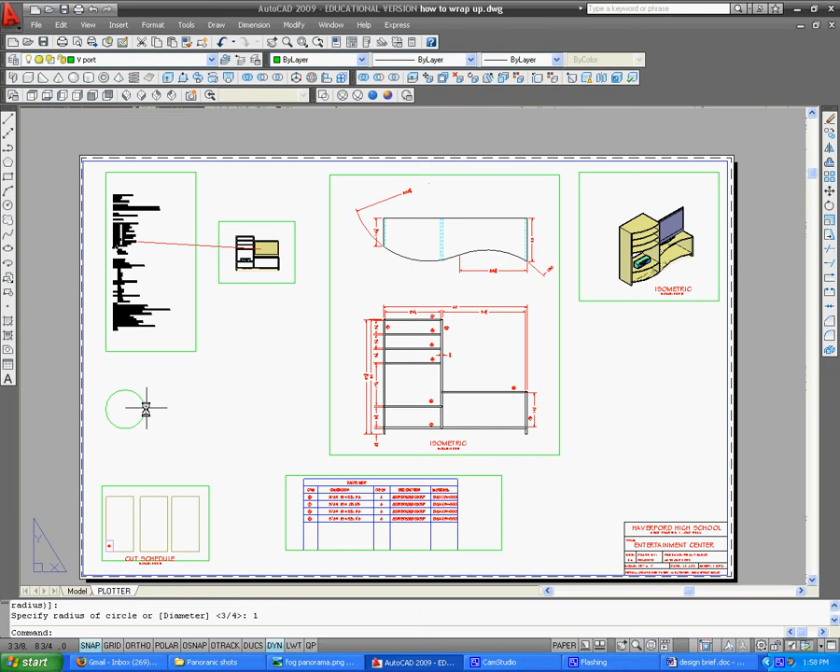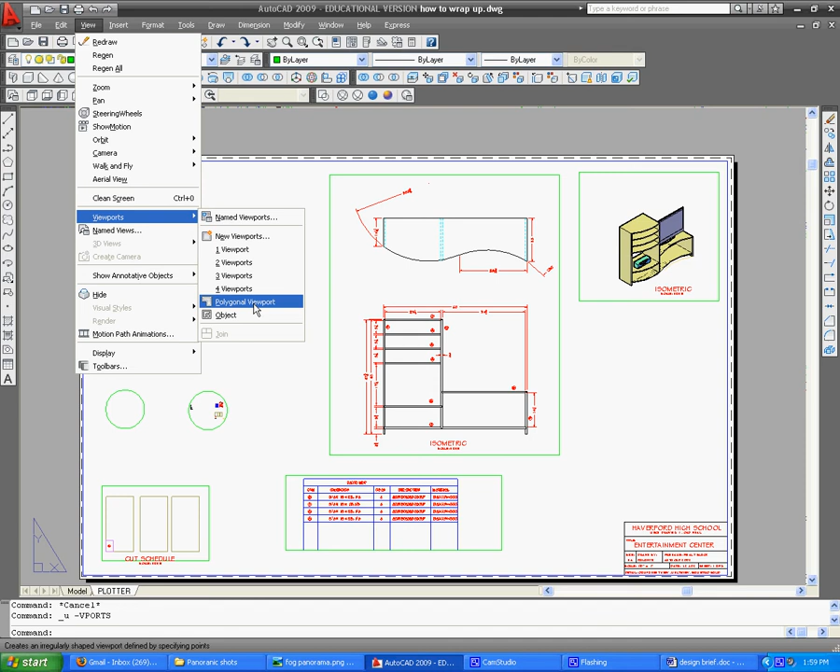This is when the computer's going to do a lot of math because we're going to make these viewports. This is interesting. Go to View, Viewports, pick object, and choose that object. And it became a viewport. Now let's do it one more time: View, Viewports, Object, and make this circle a viewport.

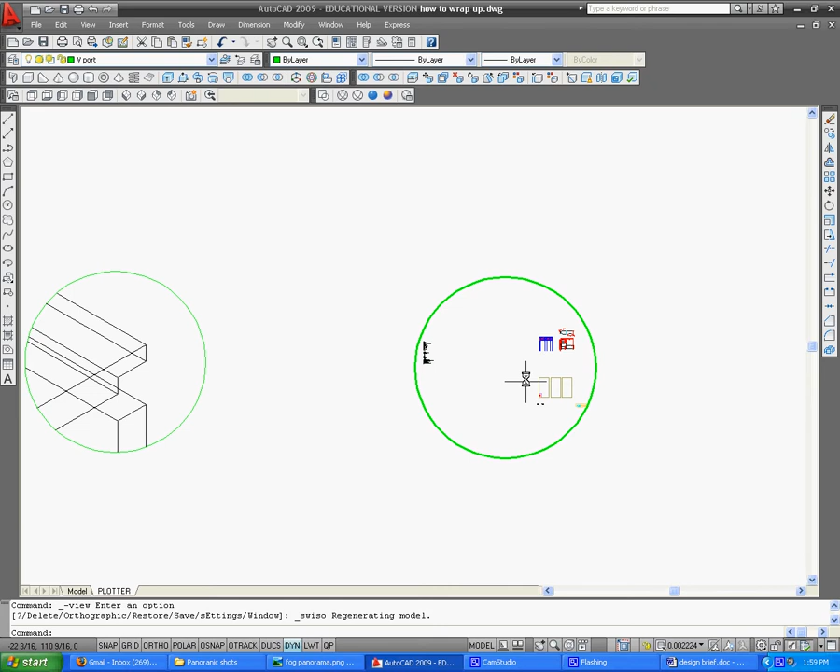Now what you want to do is go in here and turn this to an isometric, and then find those little joints you drew. Zoom in until you have just enough exposed. These are not at a scale, though we could put them at a relative scale. It's okay. Then turn on some shading, and there you go—you have an exploded assembly.

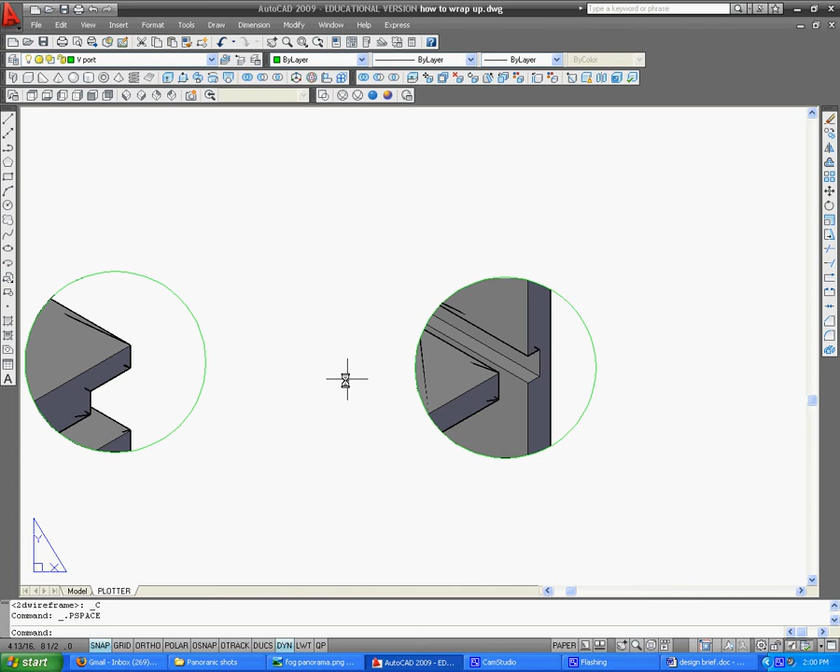Just like that. We'll zoom out just a little bit here. I'm not sure why this cube can get in the way. I don't need it really, quite honestly, though AutoCAD might beg to differ.

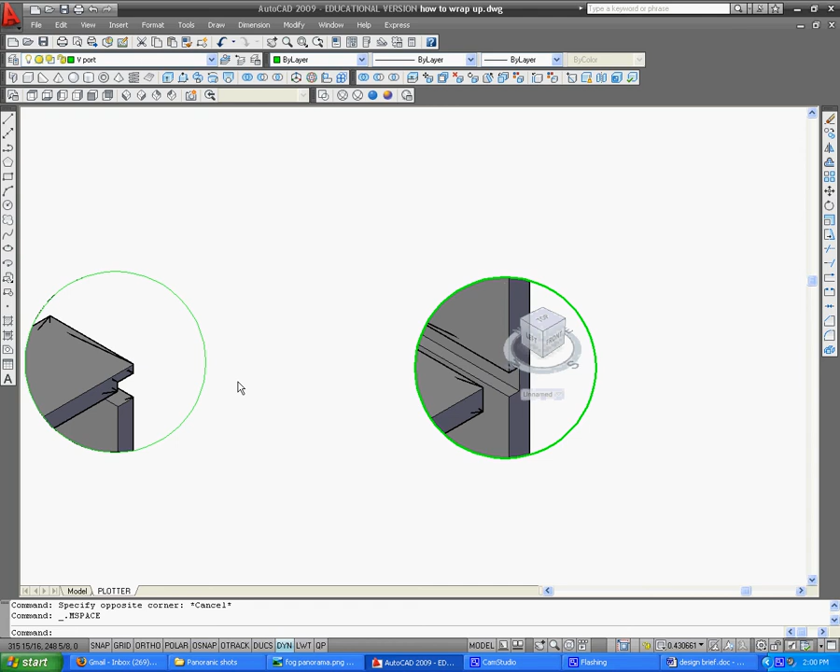So now we'll go out to paper space, and we need to label these. These are easy: Control C, V. One there, one there. This one is a RABBET, or rabbit joint. And this one is a DADO joint.

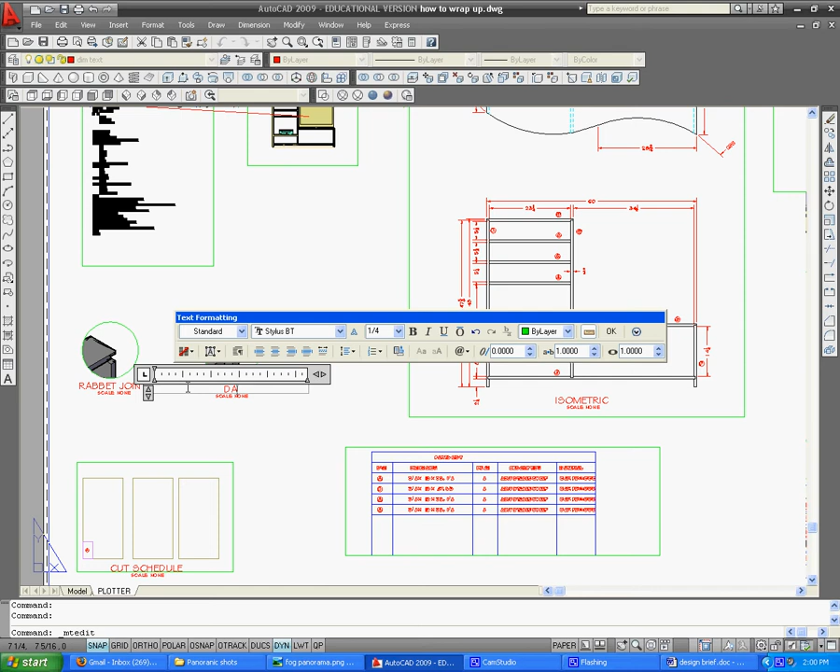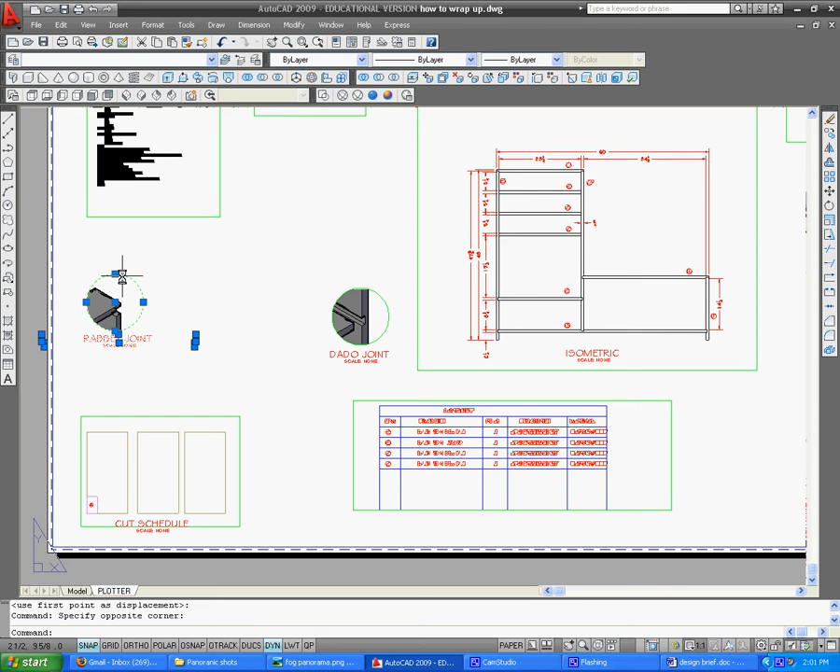Okay, now I'll take and move these closer to the actual object and what they're relative to. Go to the dimension text layer, draw a line. I can turn on OSNAP and find the center of that circle, see if it'll do it.

Looks like it's going to not cooperate very well. I'm looking, there it is. We want to go to the joint that it's talking about, so we could stop it just short of the joint. Let me turn off OSNAP so it doesn't grab hold of anything—I don't need it to create confusion in this drawing either.

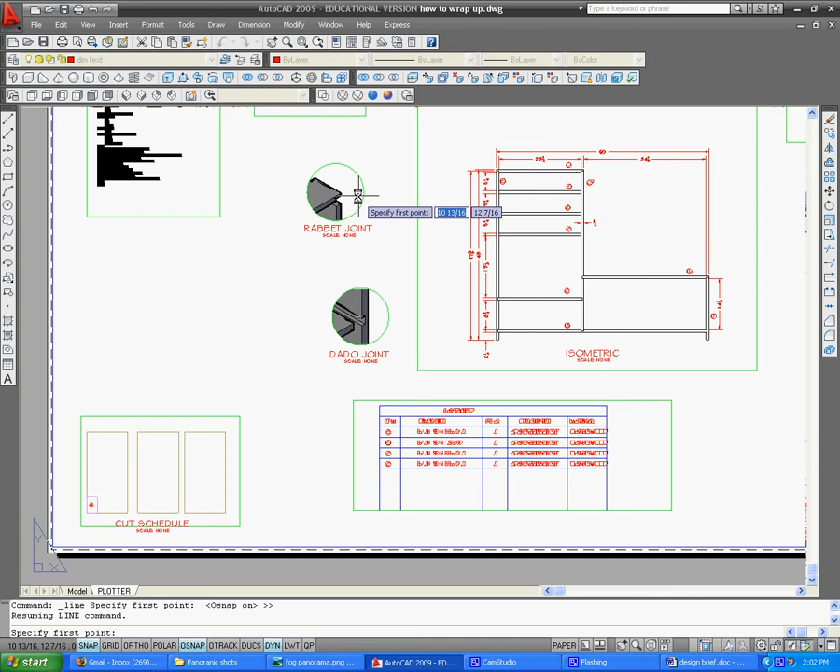By the way, in here I can see this broken up information means that it should be at 2D. You can manually go to paper space down at the bottom of the screen, by the way. Let's go ahead and trim it—right mouse click, and then get rid of that.

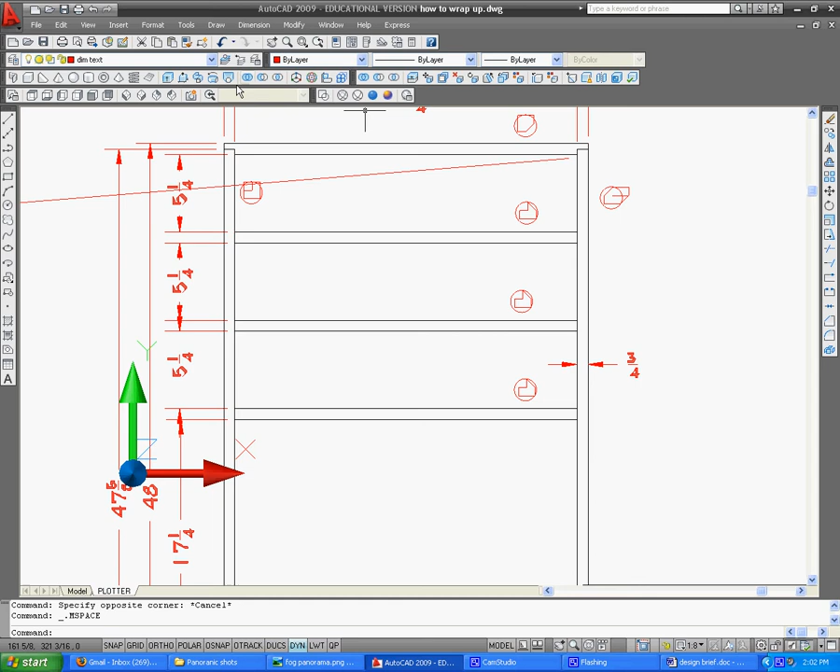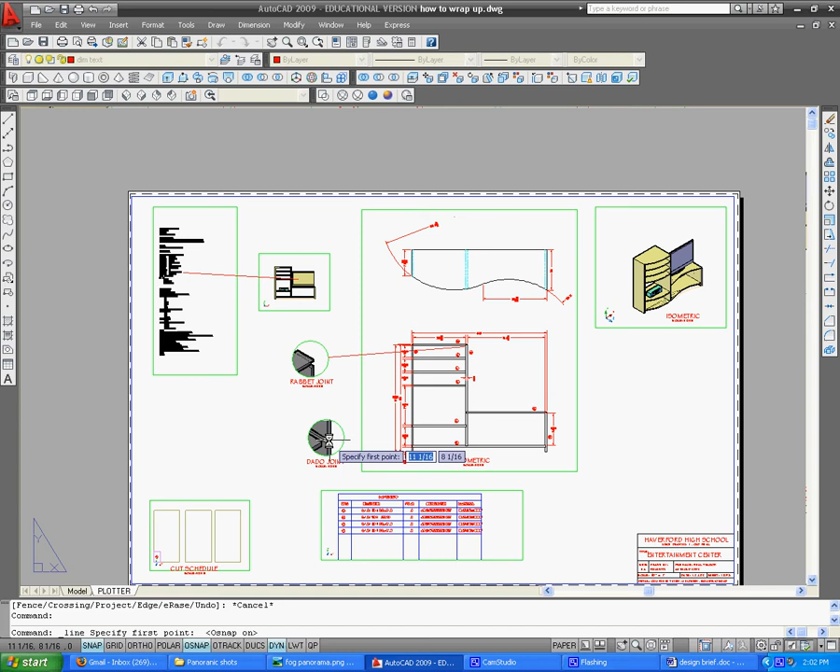Draw a line from the center of this one, OSNAP, and we're going to look for a dado to point to. Try not to cause too much confusion—just come close to it, be good enough. Trim and get rid of that. We're pretty much done.

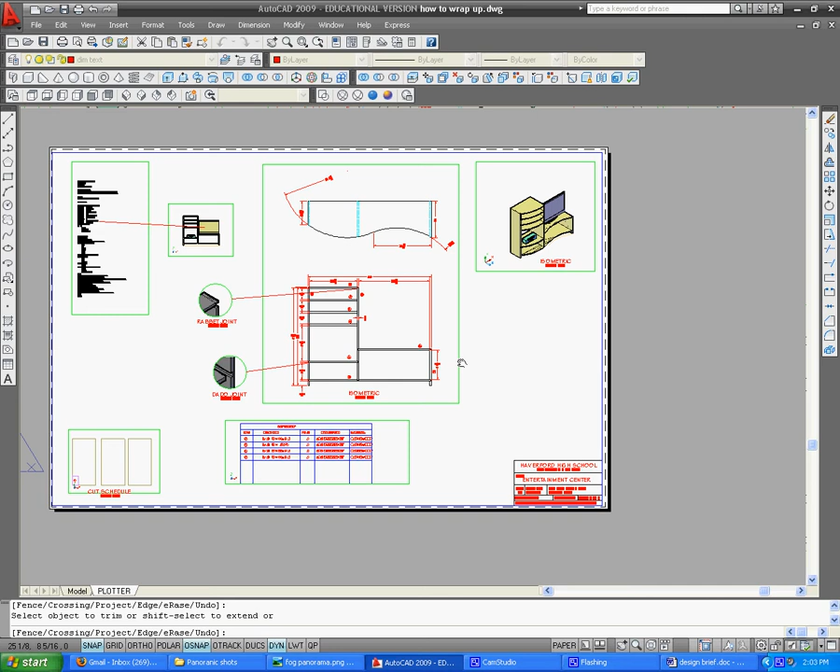We're going to double check all the windows that are at a particular scale, and the word 'none' shouldn't appear here. 1 to 8. This window should be at 2D. You can watch the text just write itself.

Oops, let me do a save. I'm pretty far into this. This is where it doesn't look a little like how it goes. I'm still saving, sorry. All right, mouse is back.

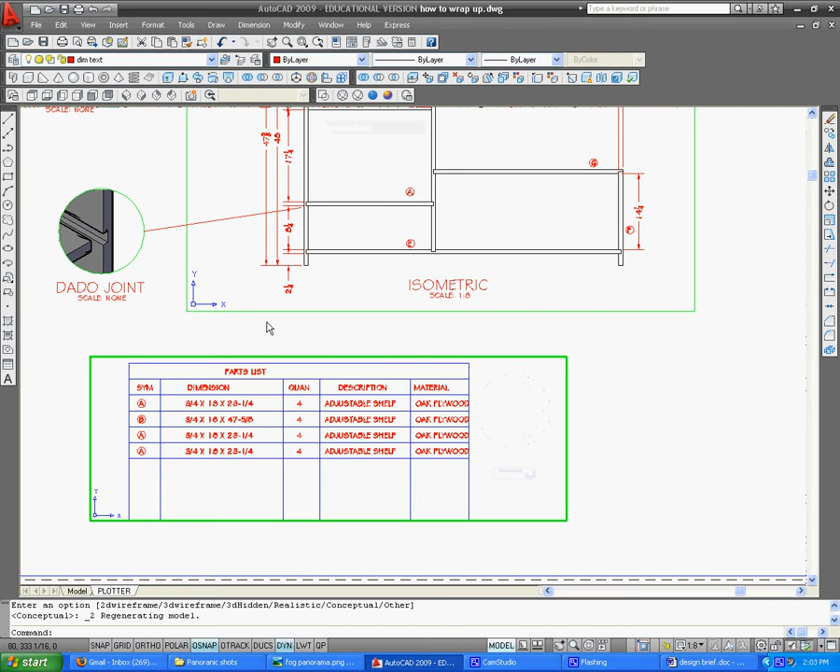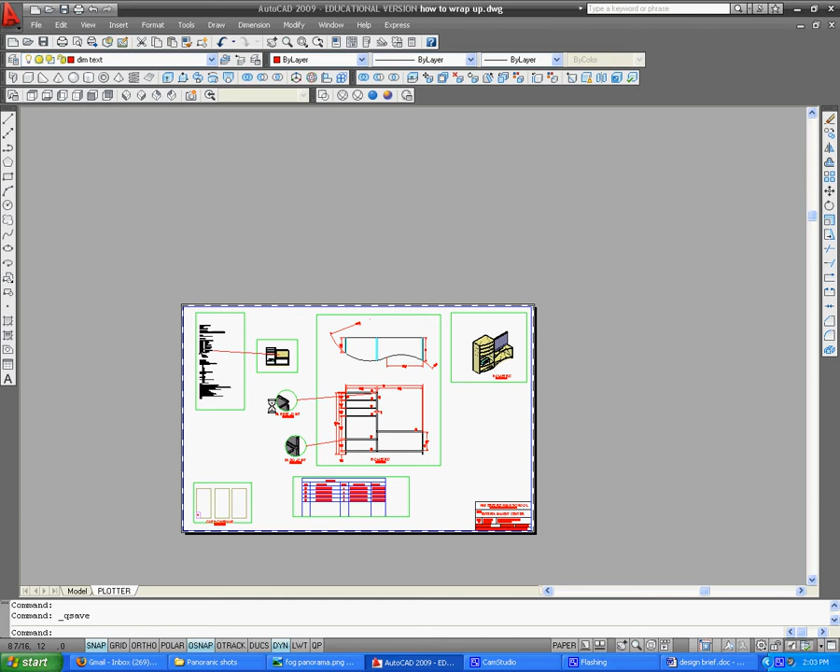That's 1 to 8. The other ones don't have scales that are marked. This one is also going to be 1 to 8—it is, you can just check them. That means the text is going to be the correct size. I don't know whether this can go to 1 to 8. Let's just try it—I did get rid of a lot of stuff.

You've got to get rid of the word custom, go to 1 to 8. Now let's just find out how large. I can undo this. That's not too bad. Let me just—it's nice to have all the text.

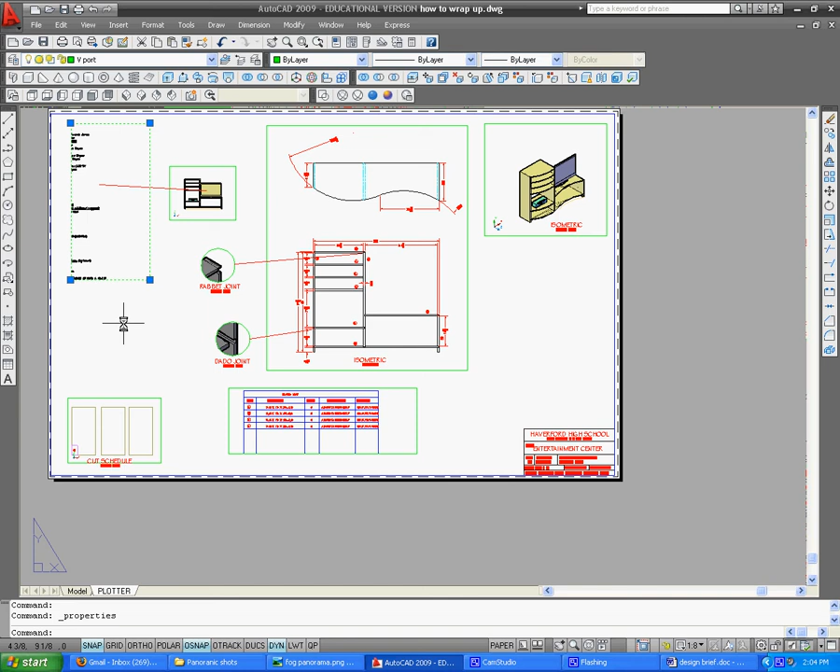In relative size to the drawing, it's great to be able to do that. An employer is really going to look at you and say, wow, you really did a great job on all the formatting of the drawing, everything. The text on the output is the same size.

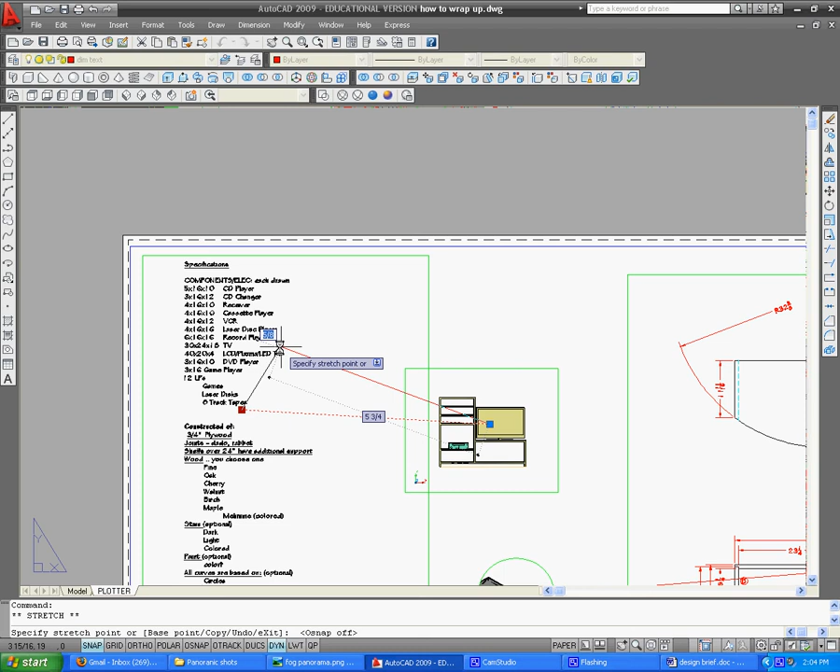So there we go, we just need to turn everything black and white. Double click in paper space or model space and override everything. Control A, black and white. We have a black and white printer—well, it does color, but we print these out in black and white. Go to paper space, double click on the paper, Control A, and make it all black and white.

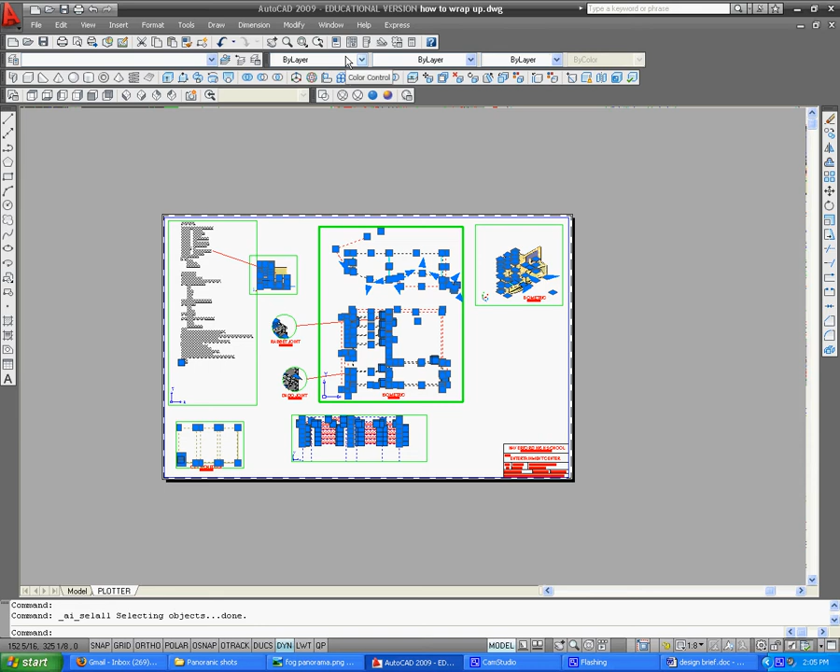And there we go. The only other drawing that might be color, you could actually take this as you do the rendering and so on. You could choose everything in the solid and say, by layer, and get a little color in there, but it's going to change this also, anything that's a solid like that. And we'll work on a rendering if we can get to it.

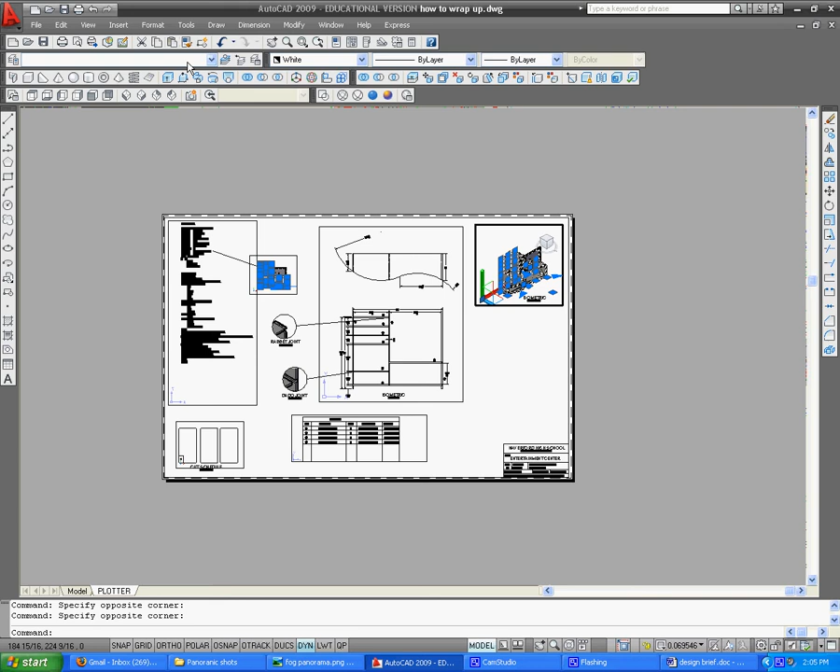So we do a Control S, and we do want to do a preview. So file, asking it to do a lot here. Do a plot preview, and with driver, let's see. All right, so everything looks good.

I kind of would like to see the circles around this stuff. So let's take those viewports and actually put them on the title block layer. So we'll lie here, and we'll go to the title block layer or border, right? Plot preview.

And there we are. Now you can toggle around to see what your given line weights are. I'm not seeing an object line weight that's different than the dimensions. Can you see that? So we've got a problem.

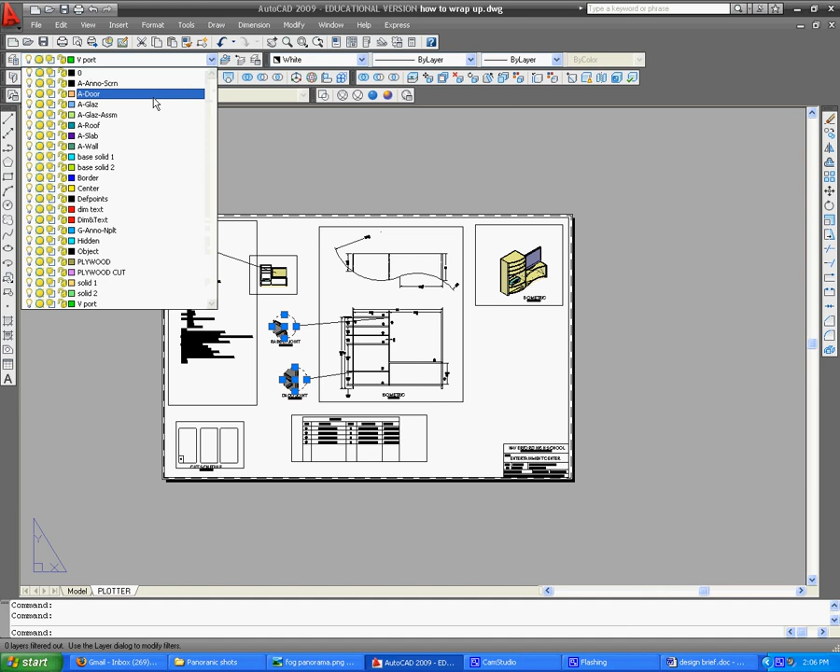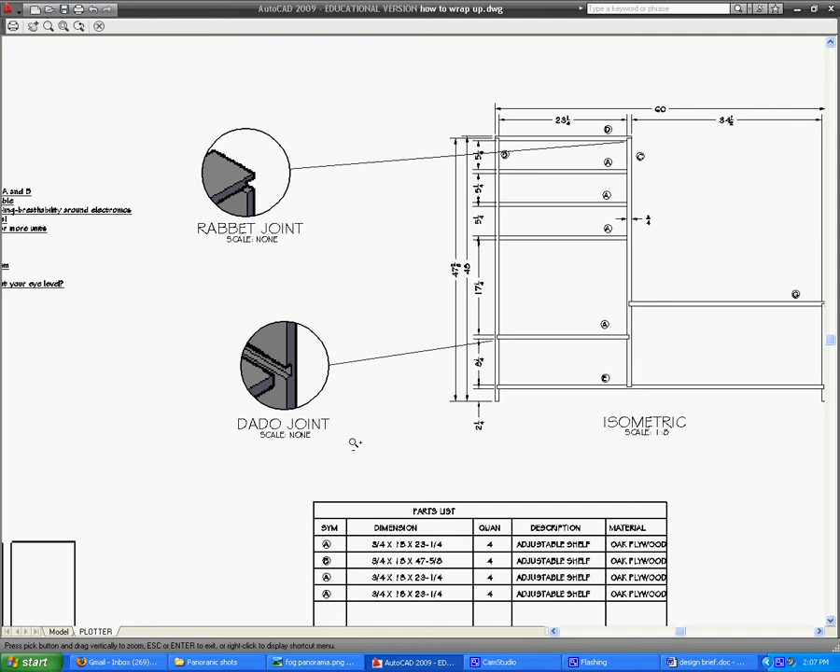All right, now you can turn on line weight if you want to, and you can see some line weight. So right away there's trouble. All right, so that line is on the object layer. That must mean the problem is here.

So go to Object. That's right, it's set at default. There's the problem. So that needs to be at a 7. You're hidden at a 5. And everything else is at default except for the title block, which is the border, which is at a 9.

You can double click these lines to get to see what's going on here. Now we should be okay. All right, there's some line weight, right?

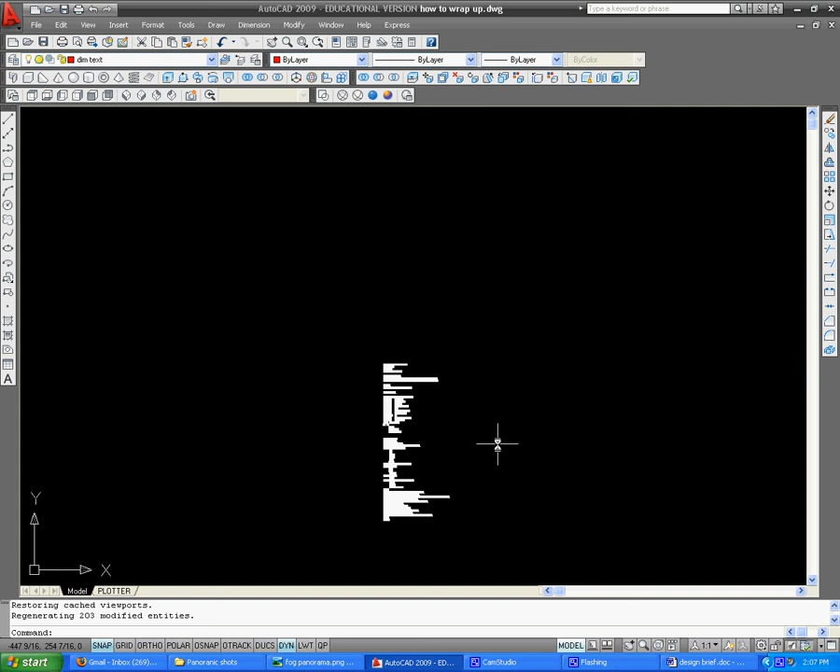Looks pretty nasty there. You can right mouse click, go to settings, and knock this scale of line weight back just to kind of help you out a little bit.

Go back to plotter, plot preview, and you'll find you've even printed it. That's why you probably print more than once when you're actually doing almost anything professionally also. It's kind of the way it goes. You also have people that are checkers.

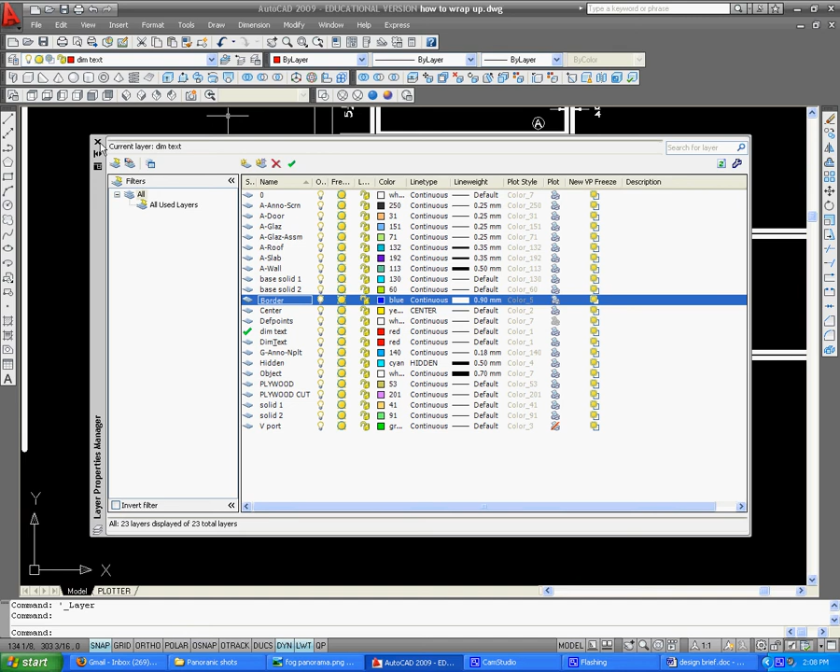Now, the title block's not filled out yet. It is an entertainment center. It's mechanical drawing, CAD, final, yes. You need your last name here. Cursor's moving around here. The file name should be whatever you called it, and scale is 1 to 8. This is 1 of 1 sheet.

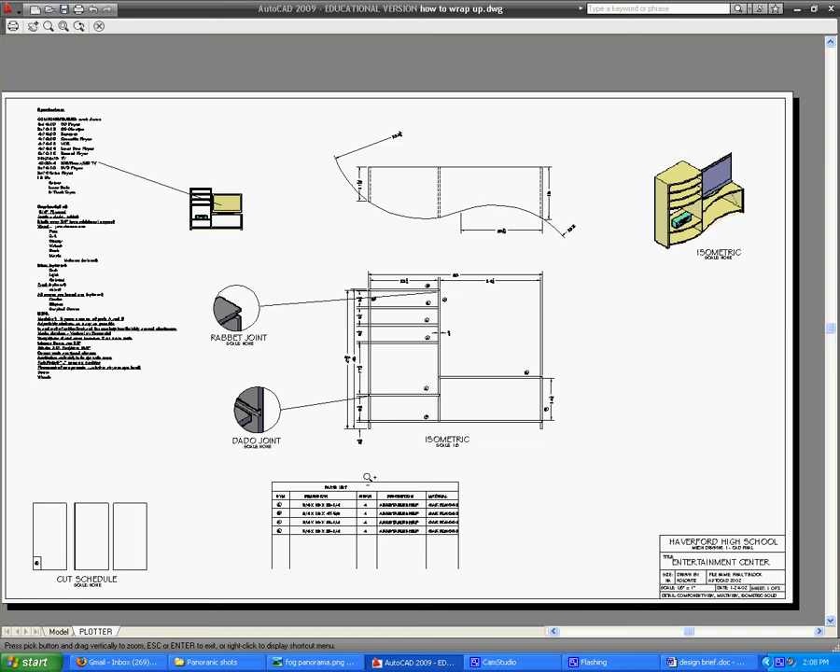So let's just amend some of this so you can see how it works. So last name, like to put your first initial in there. You don't need a period.

Say OK. The file name, you should actually go in and rename your file, and you should call it your last name, CAD final, and you should put 2011. You really do need to rename it. A lot of people have had several names as things have been going here.

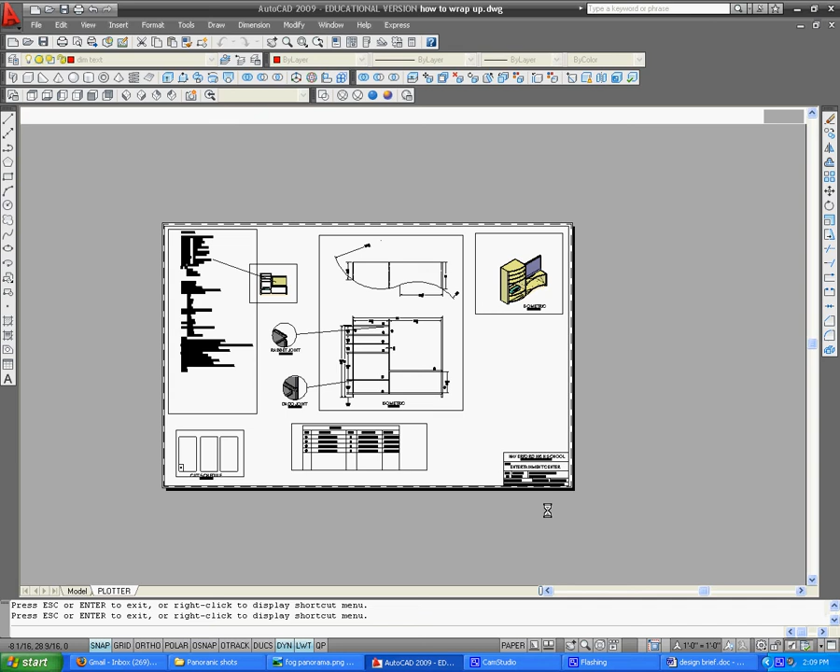The software is AutoCAD 09. The scale, 1 to 8, or you could just do, I think there's several scales. I mean, some are none, so go as noted.

The date you can change, sheet 1 of 1, and I believe the rest of it is true. Component view, multi-view, isometric solid. That's pretty much it. Do a save.

You do a rename project because you probably have some bogus name right now, as many times as we had to name these things. I will be collecting these. You'll be handing them into the hand in folder, and I'll archive them. And it's very necessary that you name them last name, CAD final.

Let me go in here. That doesn't designate the class. Let me put a 2001, 2011. CAD final, that'll be good enough.

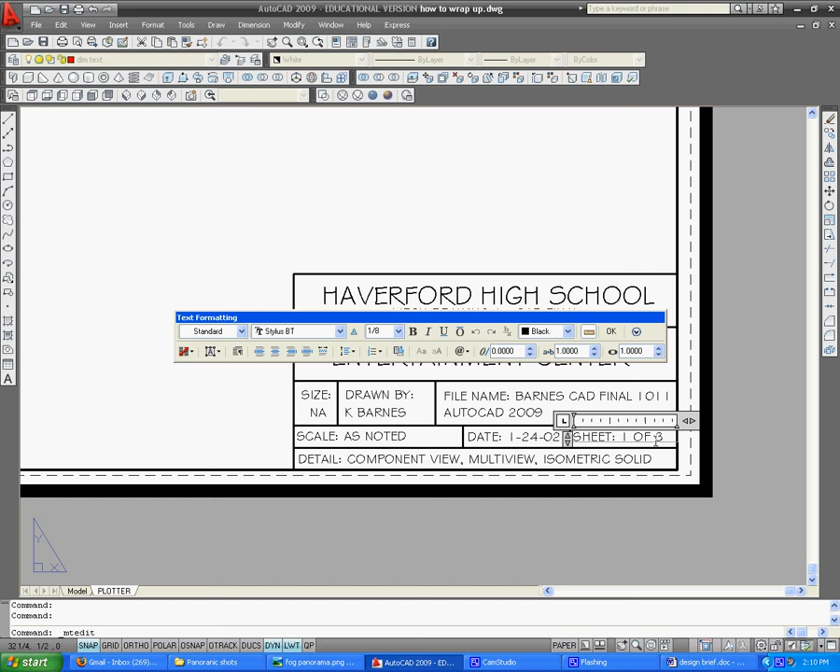Okay, so that pretty much wraps it up. Plot preview, let's take a look. We have asked Mr. Barnes if he's got the right paper in. Sometimes we've got photo paper in, and that's very expensive. So you can do a send when you're ready. That pretty much wraps it up.